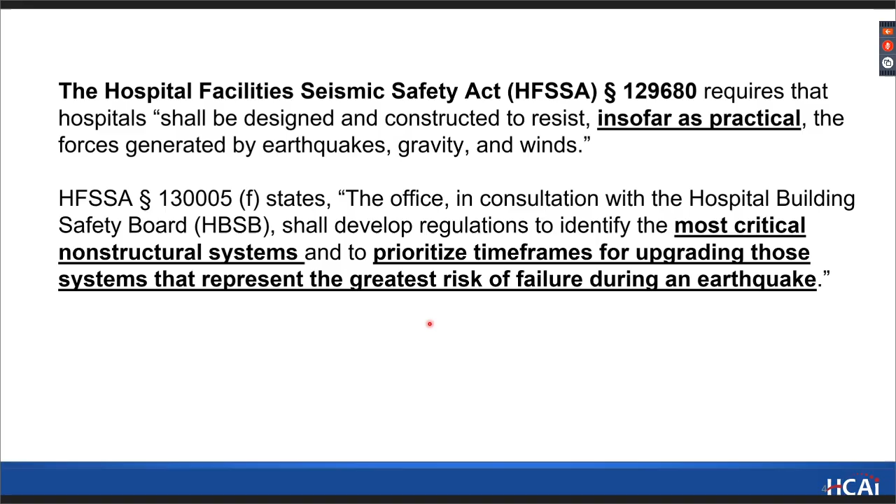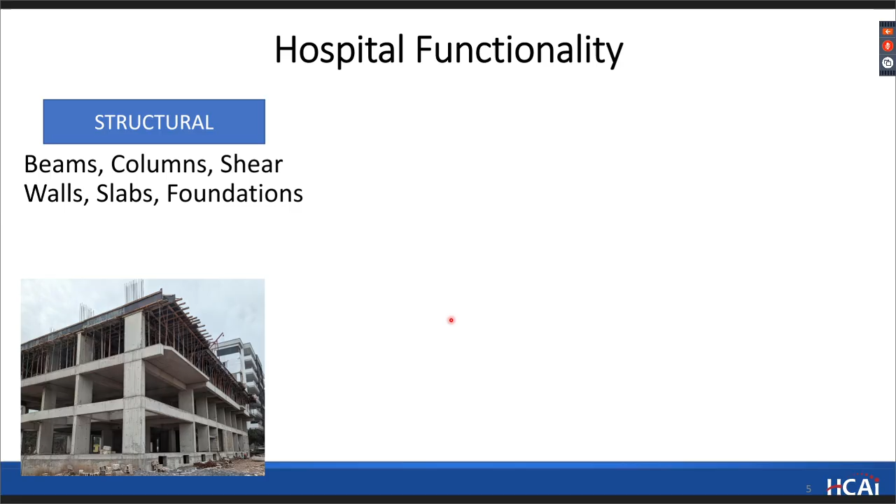When we talk about NPC, we talk about functionality, but functionality really has three aspects. One is structural, which we call beams, columns, shear walls, slabs, foundation, the skeleton of the building. The rating that we use for that is SPC, or Structural Performance Category.

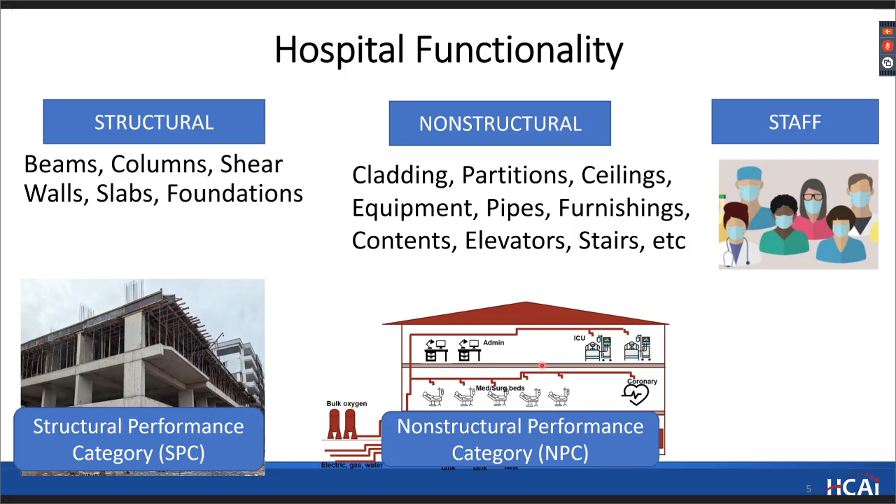Non-structural, so other things in the building, which are partitions, ceiling, cladding, equipment, pipes, furnishing, contents, elevators, stairs, many things, we call that non-structural. And the rating for that non-structural is NPC. And of course, functionality, staff makes everything happen. So what we are trying to do here is to give doctors and nurses all the tools that they need so that they do their miracle every day.

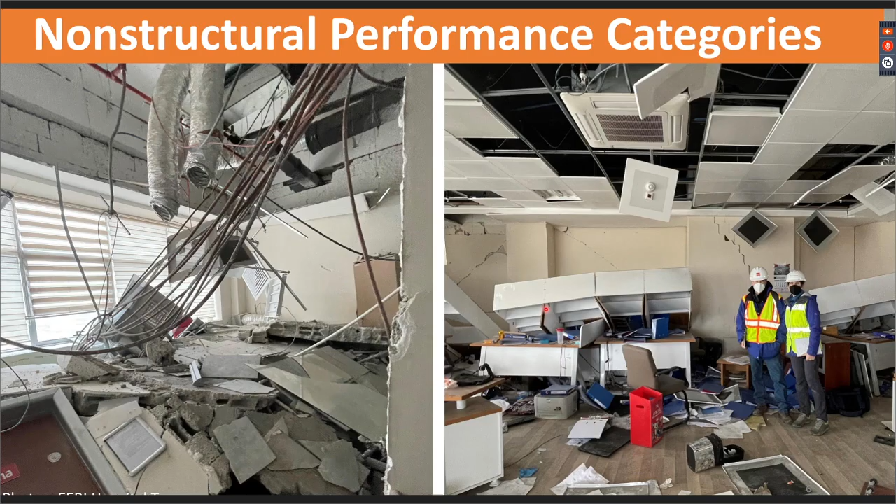So the non-structural, the importance of non-structural systems, there's nothing new, but again, in the latest earthquake in Turkey, it showed a renewed emphasis on the non-structural systems that should be tied, braced, and thought about throughout the building to provide healthcare services after an event.

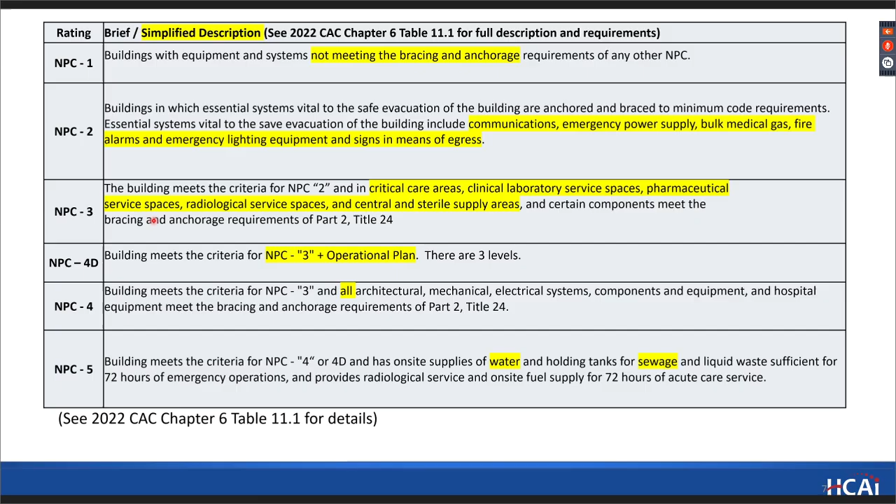So the rating system that I mentioned on the previous slide about NPC, we have 6 categories. I'm not going to go through this table, but basically 1 is the worst, 5 is the best, and there are steps in between, and we're going to go through more towards NPC 4D and 4 today. If you want to know more about NPC 3, I would go back to the seminar 2 years ago so that you will get more information and the handouts.

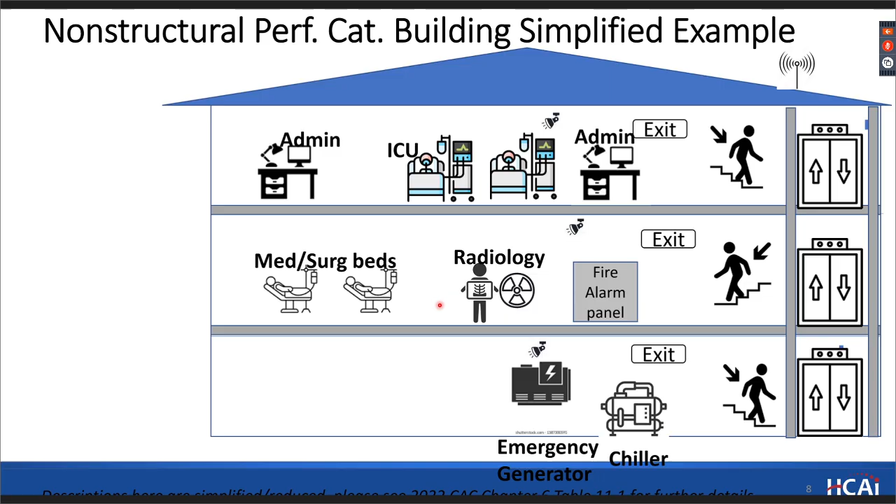I showed this sketch pretty much on all NPC presentations. Again, this is a super simplified example. So let's say this is your hospital building with lots of functions in it: admin space, med surg beds, radiology, so on and so forth. All of these things do work because of utilities, electric, gas, water, oxygen, so on and so forth.

So they are all tied together. There is a network of systems within the building, between buildings, and outside. So as a starting point to this building, our starting point is NPC1, meaning that either nothing is braced or nothing was looked at or evaluated.

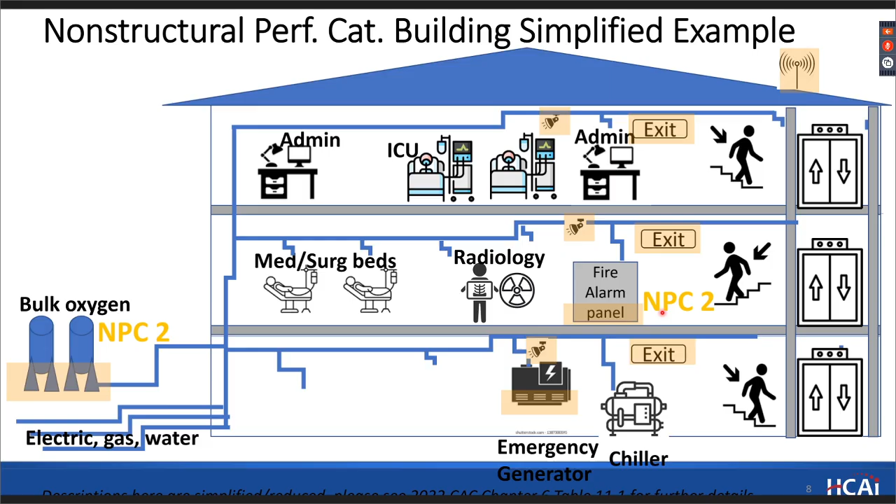If certain evacuation systems generally are looked at, which is pretty much the scope of NPC2, bulk oxygen, fire alarm panel, some emergency generator anchorage, exit signs, some communication, very, very little, the building and the facility gets NPC2 rating.

NPC3 or NPC4D level 1 looks at some critical care areas, such as ICU or radiology, which we call NPC3 areas. Within those boundaries, within the walls of the area, things are braced. So you see that pipe, there will be a bunch of brace here, bunch of brace here, but right outside of it, there's no brace required.

So in an earthquake, obviously, this utility line, if it breaks here, it won't function here. So NPC3 or NPC4D level 1 does not target functionality in those spaces. It basically targets to tie everything around the patients so that it doesn't fall on them, so that they can leave that space safely. So NPC level 4D level 2 and 3, which I will talk about, looks more about the functionality through bracing all the way to the source.

NPC4 is actually a holistic all building systems and utilities. So most of our newer buildings get NPC4, or the NPC upgrade to 4 looks at all the braces and equipment, or utilities and equipment, and bracing all those so that it gets NPC4.

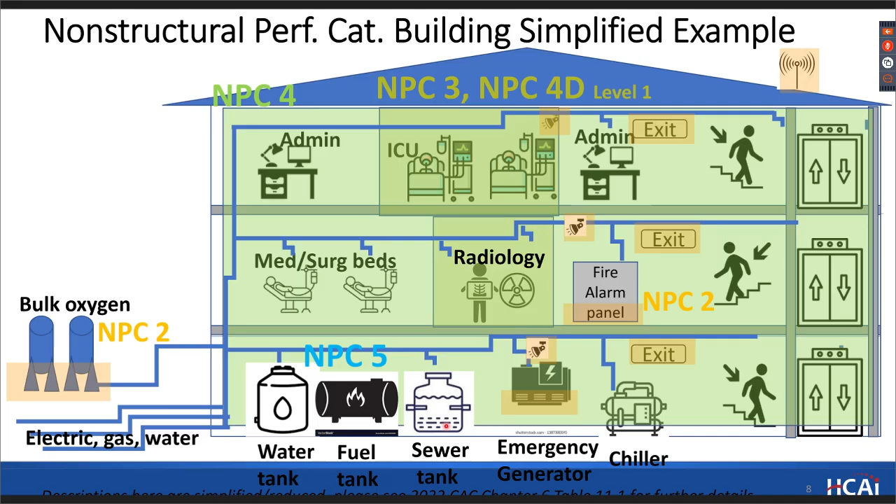As I mentioned, in the last year, while we received a few thousand evaluation reports, we looked at them, reviewed them all, commented, sent it back. So we are caught up. We may have maybe 17 or 18 back check pretty steadily, but if you haven't received a comment from us, talk to us, because you should have received all the evaluation report comments by now.

One common thing about that is when we send the comments out, if the contact is no longer there in the facility, there might be some break in the communication. But you can always log into your project and see where the comments are and when that was made. So I'll focus on 4D and 4 mostly on this presentation.

So for those of you who are not quite familiar with 4D, the requirements are set in California Administrative Code, and you can see the details, the requirements, and all that.

As I mentioned, NPC4D is basically NPC3 with some levels in it, levels 1 through 3, and it's all about bracing and anchorage.

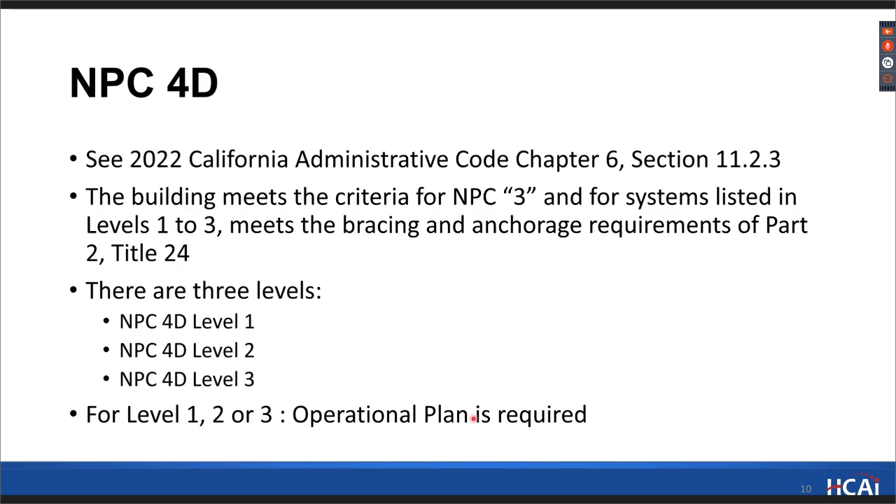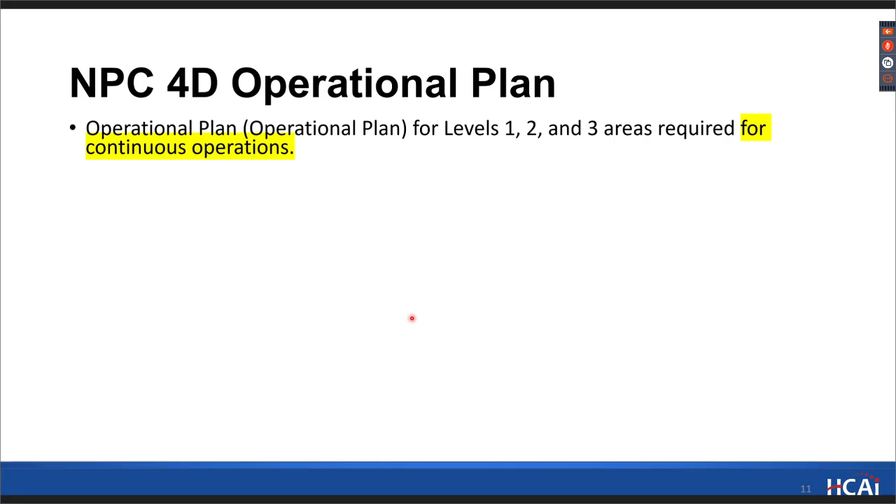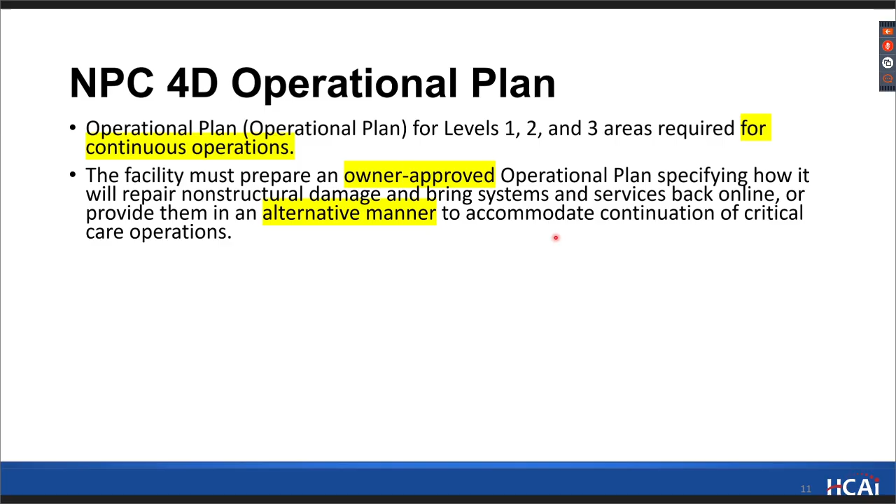So the operational plan is all about continuous operation. How can we achieve facility-wide continuous operation by looking at things more detailed? The operational plan should not be just prepared by design professional. It should be owner approved, and the owners should be truly heavily involved in the strategy of the operational plan. So it looks at where to brace it so that you get that functionality, and maybe where not to brace it so that you have some alternative manners for that functionality, which I will come to. Again, we are looking at keeping the facility operational.

The code also says that when you are submitting this, make sure that you include executive summary, narrative, management of utilities, etc. The operational plan portion, we publish it on our website.

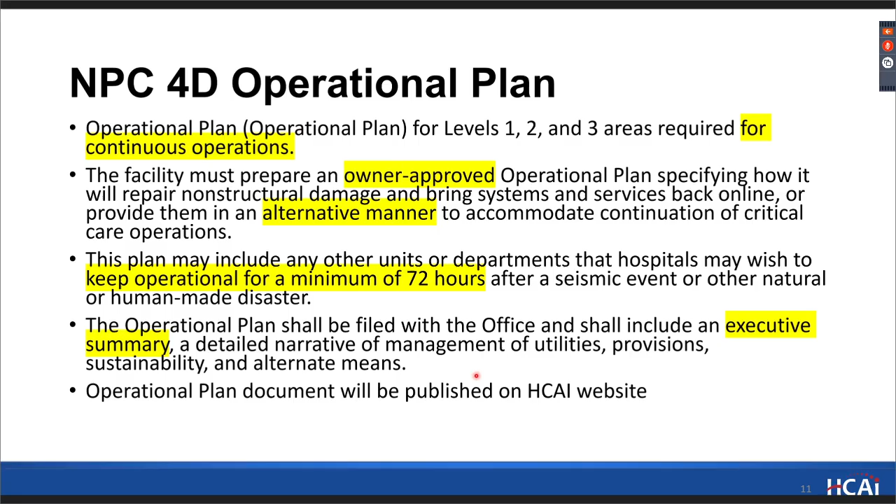Couple suggestions on the operational plans, since we have seen quite a bit of those. Please do not include sensitive information in the operational plan. We publish those, so do not give your staff phone numbers on your operational plans. So please clean those up.

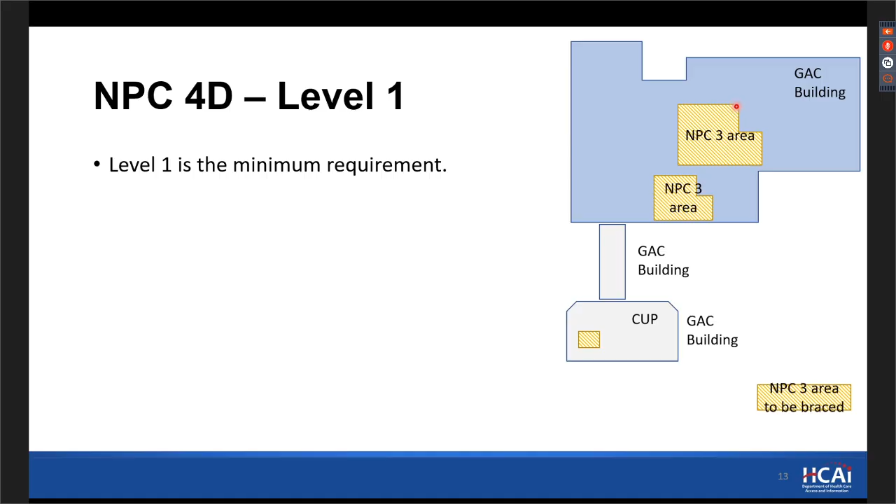Okay, NPC 4D level 1. Quickly, if I go through that - if you have a general acute care building, let me put my laser pointer back up. There are NPC 3 areas, and you have a CUP building, central utility plant, and other buildings that are on the way. Bracing these NPC 3 areas for level 1 is the minimum requirement.

Now, level 2 and 3 are optional, depending on how you want to strategize your facility operation. So some buildings may end up with level 2 or 3, but it's a strategy.

One thing that we keep seeing is design professionals focusing on just the general acute care building they are contracted to, but NPC 3 and 4D also requires the source equipment to be braced. So there needs to be some survey of where the utilities, where the sources are coming from, and most of the time it's just a central utility plant somewhere. So some panels and some mechanical rooms, electrical rooms - those all need to be braced.

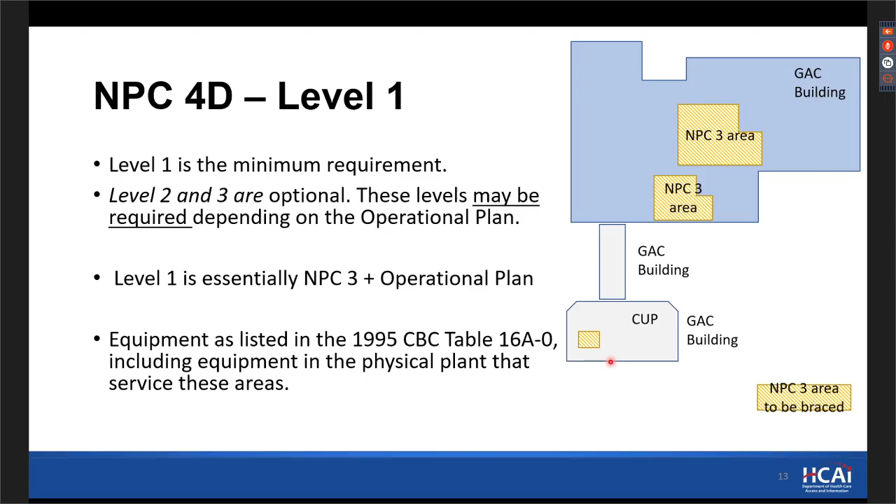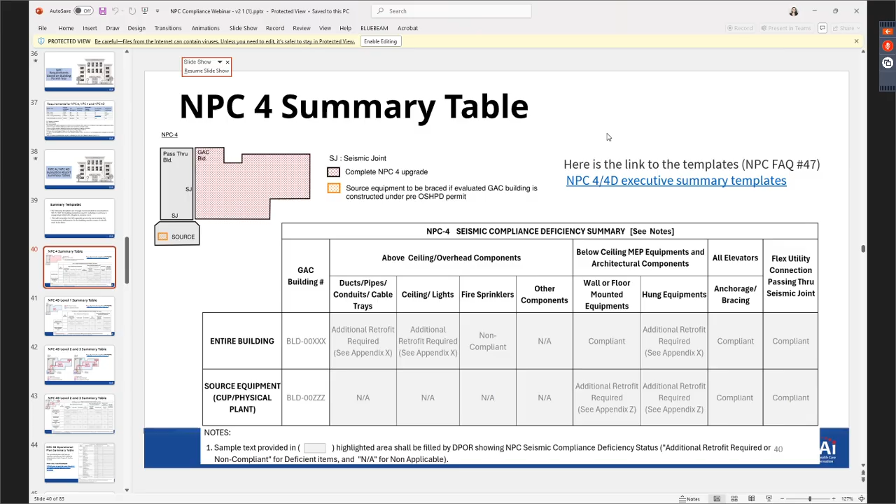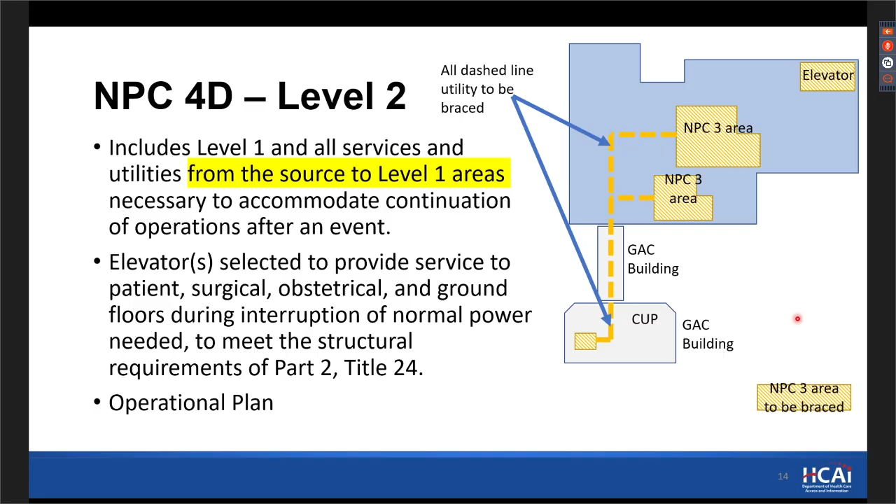Okay, so for level 2, when it comes to elevators, you need to select certain elevators to upgrade. Again, an operational plan is required.

Now, this is something that we use quite a bit, something we call level 1 plus. It's something in between level 1 and level 2.

So just think of two NPC 3 areas right here, and let's say you are bracing from source to that area, so you're basically ensuring functionality here. But this one, you have an alternative somewhere else. So you say, okay, I don't want to spend resources or money on this one because I have a good alternative in another building, so I'm not going to brace the utilities from here to the source. Which means the critical care areas or the NPC 3 areas are not all braced. So your rating is still level 1, but your operational plan gets a whole lot easier.

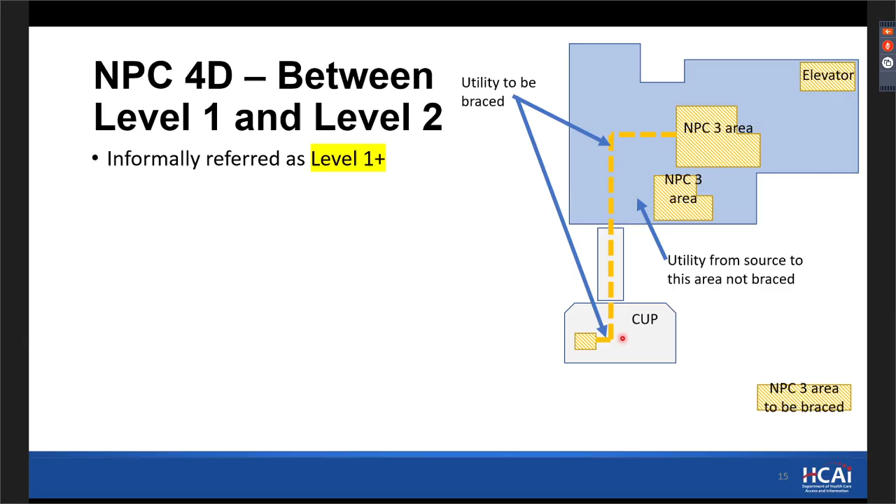So there's this surgical approach you can do to optimize what you upgrade. And again, there's no such thing in the code that says 'plus' - it's just a strategy between 1 and 2.

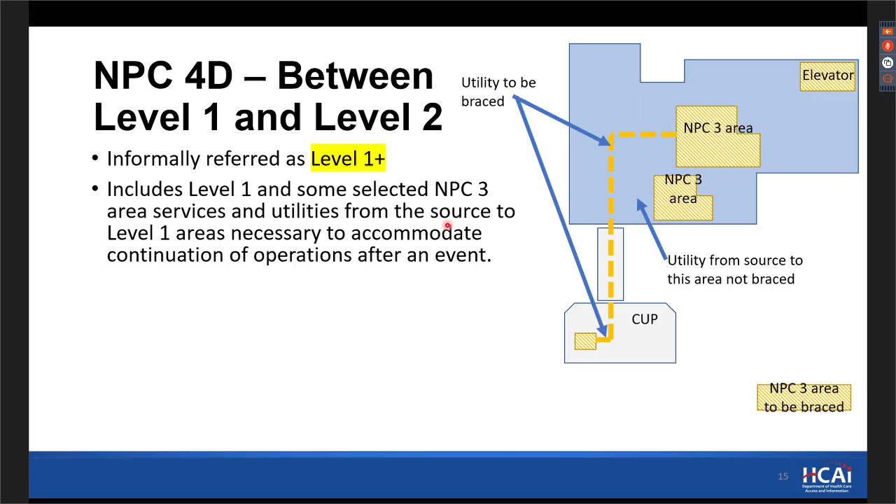Okay, level 3 is basically level 2 with more areas that you choose. So the rules are the same - there's really nothing new there.

NPC 4 is, like I mentioned, bracing pretty much everything - architectural, mechanical, electrical equipment, and so on and so forth.

One common question we got is about NPC 3 area exceptions. Those exceptions don't apply to NPC 4s for upgrade.

Most of the time, there are a lot of past projects in the building that you can take credit for. Just think of it like a map where you have a bunch of areas already explored and upgraded, so it's just a matter of finding gaps between those past projects and focusing on those. But please make sure those projects started in the past were closed in compliance. If the status of those projects is closed without compliance, you cannot take credit, or if you want to know how much was finished in those projects, you need to go a little more document route to see what happened in the past.

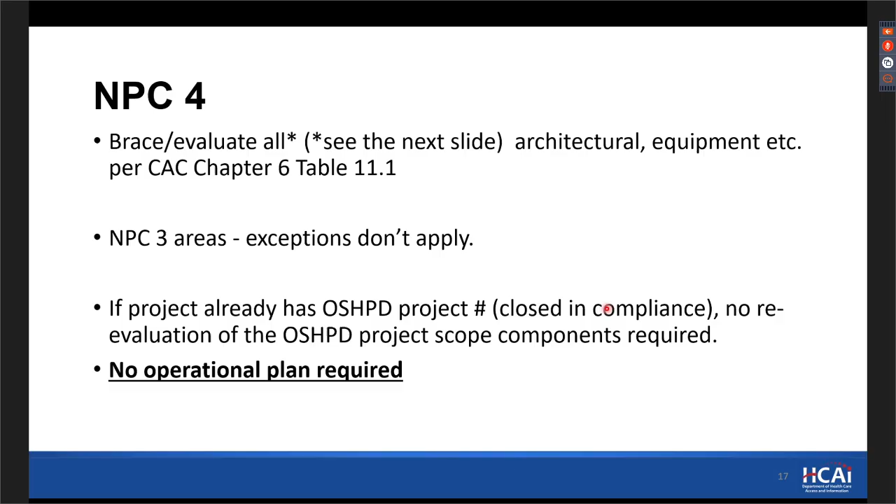For NPC4, the nice thing is operational plan is not required, because if you brace everything in the building, the expectation is reasonably there will be function. But again, no one is guaranteeing 100% everything will work - it's just a reasonable assumption.

Now people say, is it really bracing everything in the building? Well, there are some exceptions in NPC4, and I'll just highlight a couple things. When something is attached to an architectural item, such as walls, people ask, should I upgrade all the light frame walls? The exception here is when 250 pounds is attached to light frame walls, and if a single stud gets 250, then you need to upgrade that stud.

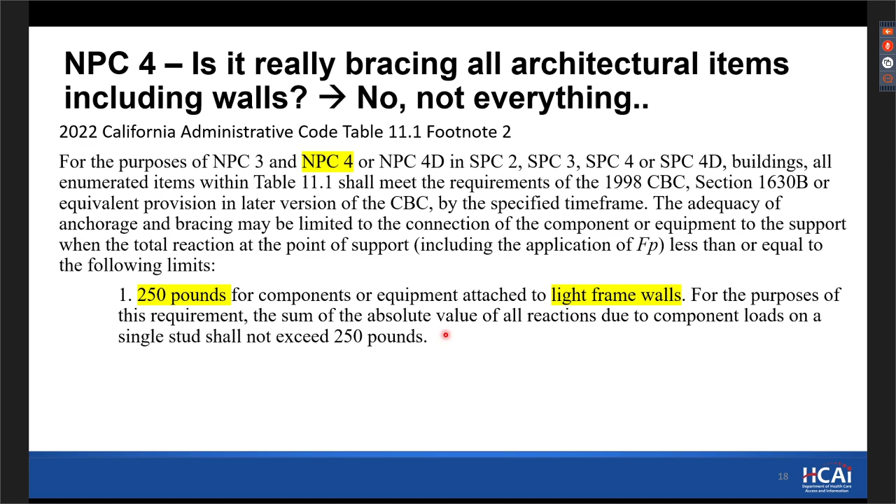250 pounds per single stud is a very big piece of equipment attached to the wall, so this doesn't happen frequently. So the focus of upgrading light frame walls is pretty minimal. And then there are other things like, hey, if I put 2,000 pound equipment, how much more evaluation should I go? It's actually pretty flexible on how much you should go. So it's everything, but not really everything.

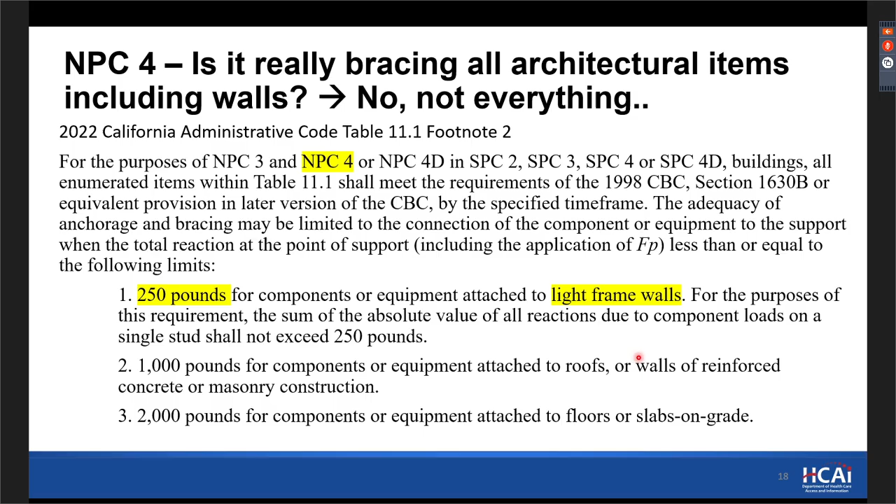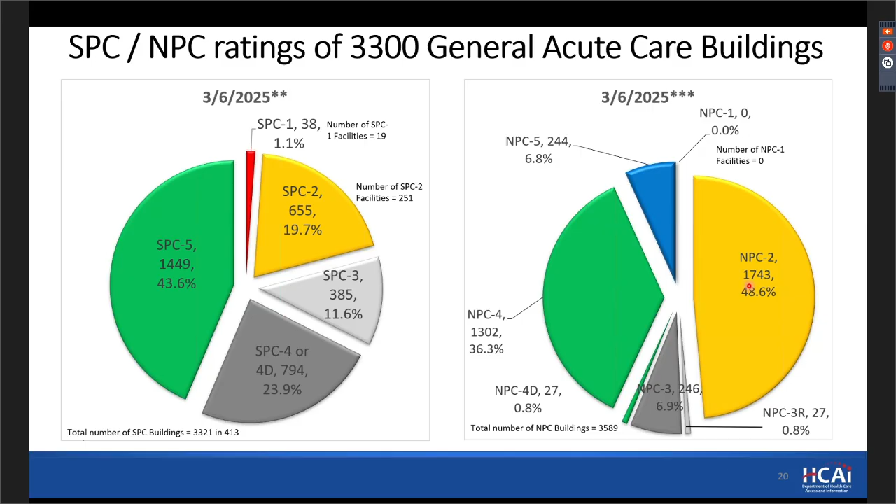When it comes to non-structural, the picture is different. We have NPC 5, 244 - this is growing actually pretty rapidly with the evaluations and upgrades happening. NPC 4's pie slice is getting much bigger lately. 4D is probably accelerating the most, and you're going to see a whole lot more movement on getting the 4Ds. For NPC 3, we still have 246 of them, and almost half of our inventory is NPC2. This is the pie slice that requires anchorage or more careful consideration. Luckily, we do not have NPC1 anymore.

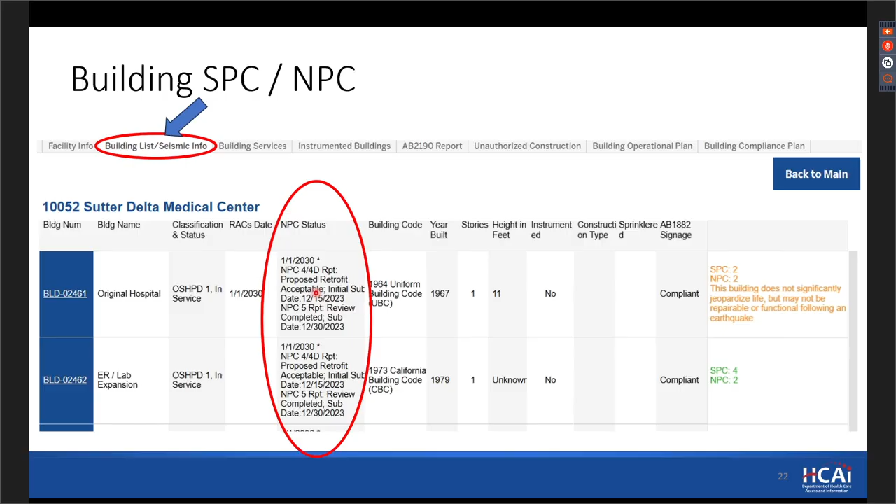Now you may say, okay, what do these things mean? There's some text, so I basically broke it down. Let's take a look at options here. If the NPC status shows not submitted, it's pretty straightforward: the evaluation, we have not received the evaluation report. If you think that this is a mistake on our website, please do reach out to us so we will fix our mistake. But if it is not submitted, it shows not submitted.

Awaiting review means that the report was submitted or resubmitted for back check and is queued for review. If it says in review, which means that it got triaged in so that it has the right components and documents in it, now it's in review.

If it says review completed, it means that we sent the comments out, so please respond to the comments. If you see proposed retrofit acceptable, then it means that we received the evaluation and we accepted the scope. We sent a letter saying that we are accepting the proposed retrofit, and the next step is basically putting together the construction documentation and building it.

So if you see intent to remove general acute care, GAC, then it means that we received a formal letter from the facility saying that they are intending not to continue general acute care services in this building after 2030. So we put this building in a different category, which I will talk about later.

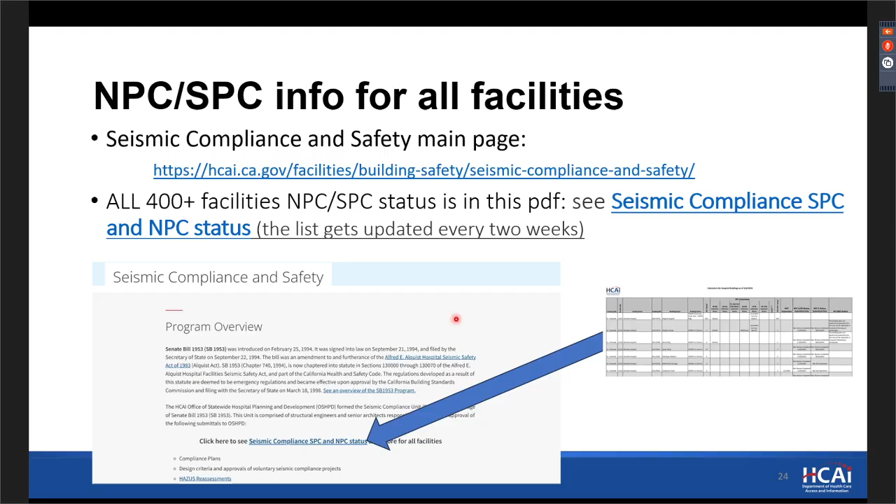It's a PDF, and you may say, well, PDF, I need Excel. Well, the way that we created this PDF from Excel, if you save this PDF as an Excel file, it will convert to Excel file very cleanly. So it's by design. Anyways, you can sort, you can do all kinds of statistics if you want to.

All right, so now we know the rules, now we know the inventory, what are the deadlines? I want to start with NPC 3 compliance deadlines. I know that this is 4D and moving towards that, but we still have a little NPC 3 compliance deadline issue. We have 2 seismic design categories, seismic design category D and F. F is very high seismic area, D is high seismic area.

Okay, the other deadlines: for the NPC 4, 4D, and 5, the NPC compliance deadlines have been set for a long time ago. But recently, in the 2025 code, with the addition of AB 869 and the California Administrative Code revisions, there were 2 little additions in between. The first one: January 1st, 2024, that's the submittal of non-structural evaluation deadline for all hospitals. So there's no change there.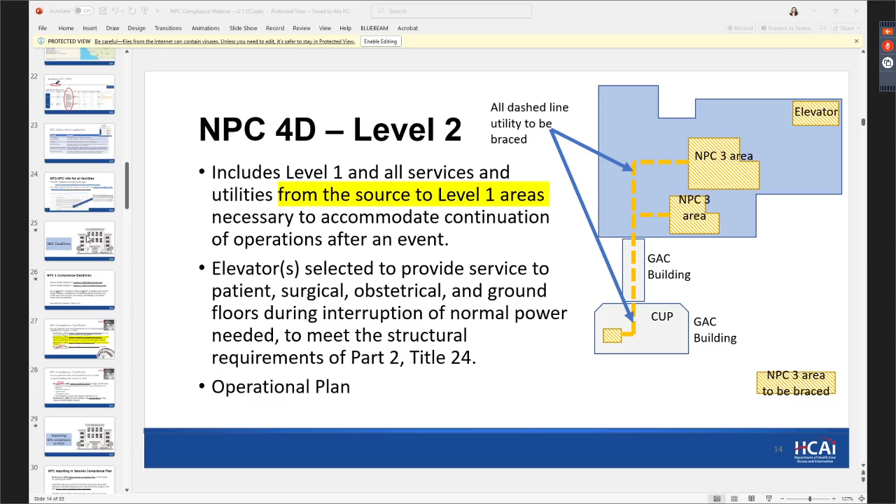By March or January 1st, 2026, all facilities need to submit a seismic compliance plan. Please take a look at the previous webinar. By March 1st, 2026, all hospitals, whether seeking delay or not, need to submit construction documents for NPC 4, 4D, and 5.

By March 1st, 2028, that's the deadline to obtain a building permit. For facilities not under AB 869, the finishing date is January 1st, 2030. Whatever extension AB 869 facilities get, that will be their deadline to finish construction.

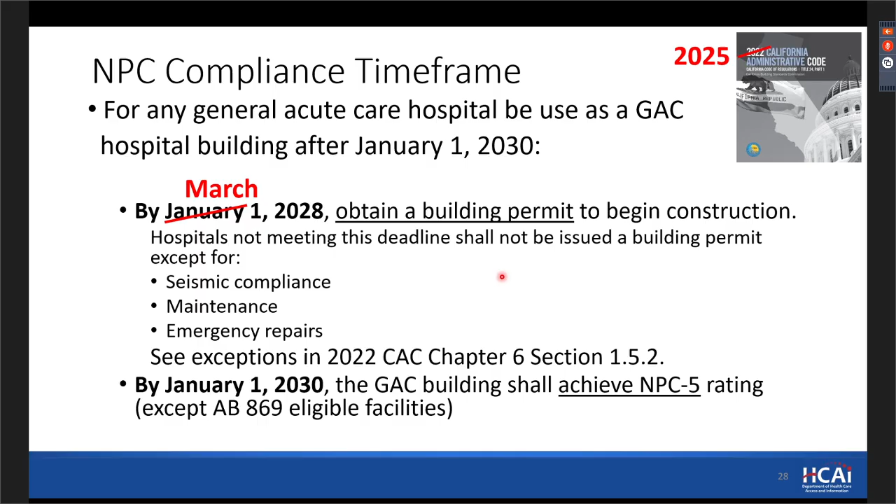You may ask, why did January move to March? Because most people in this deadline-driven industry submit at the last day or the day before. January 1st is generally not a good time because everyone is on vacation, and bringing the design professional back from Christmas vacation when things are needed isn't fun.

Reporting NPC compliance to HCAI. So those are the deadlines, but how can we keep track of and report whether these deadlines are met or not met? We will do all of this in our new automated seismic compliance plan. Again, I highly recommend looking at the previous webinar.

The way we'll be asking everybody is to put the NPC milestones in the seismic compliance plan for 4D and 5, including your time of submitting construction documents, getting the permit, and completing. We're going to ask you to put all of that in the seismic compliance plan.

So how do you do it? Basically, you use our guide. This is the ESP e-services portal user guide, section 21. It walks you through step by step on how to log in, access, and use the menus. It's more like a software user guide, and we've published PIN 80 so you can look at the background behind it.

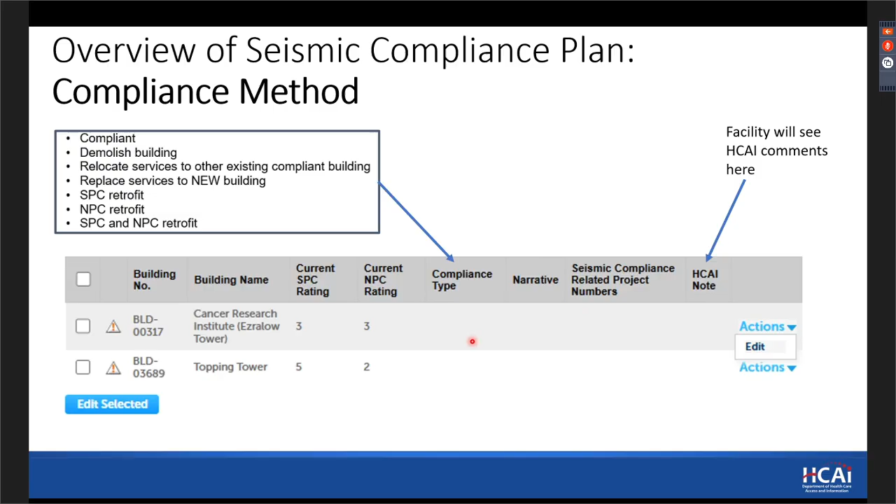The second table is more about the details of each building, again with a predetermined dropdown. I would focus on the bottom part of the dropdown, which deals more with the NPCs.

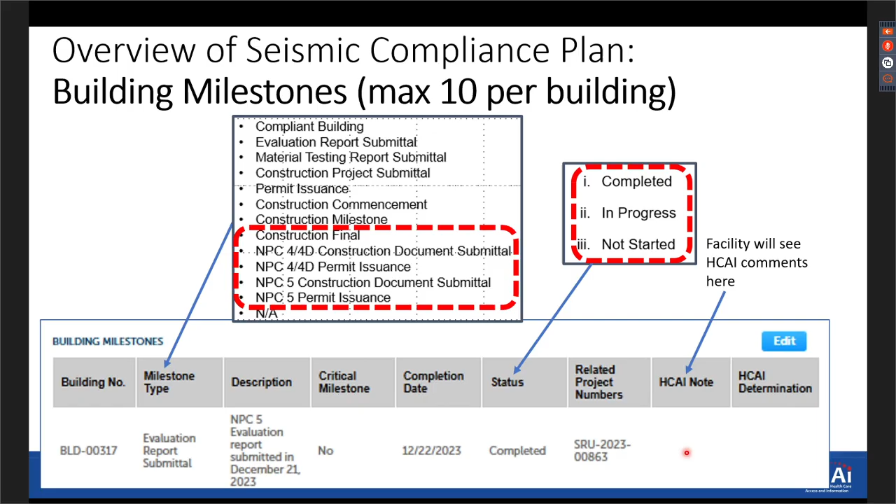We've pre-populated these so you can select and put a date. When you complete it, you can mark it completed, in progress, or not started. If we have comments, you'll see them right next to each item, for example if something hasn't been submitted yet. It's very straightforward, and if you have any questions, let us know. That's all there is on the seismic compliance plan for NPC 4, 4D, 5 reporting.

Again, I noted down how we're going to do this. There's a little nuance with 4, 4D, and 5. For 4D, each building has its own plan—some upgrade to 4D, some upgrade to 4, some get demolished, so it's building by building.

When it comes to NPC 5, it's more of a campus-wide approach. So if you're putting a big sewer tank outside, that will make everything NPC 5 after every building is done with 4 or 4D. Repeating the NPC 5 project submittal on each building would just take up a lot of time and be unnecessary repetition, so we're saying please put it in one of the simpler buildings where you're not putting too many milestones.

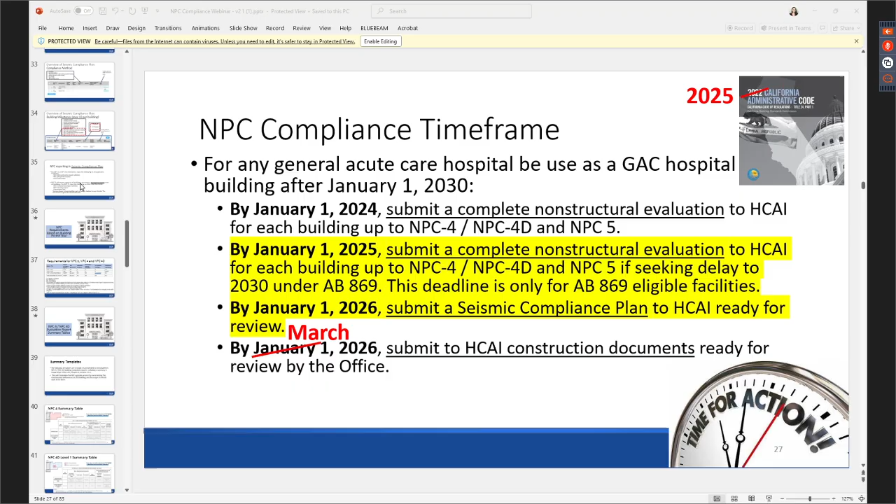It can be, again—kick me out. We'll have an IT talk. There we go.

Okay, so you can choose a simple building like canopies and sheds, and you can put the NPC 5 dates there. And when you do that, the system will recognize that there's an entry of NPC 5, so we will assume that this is for the entire facility, which generally is.

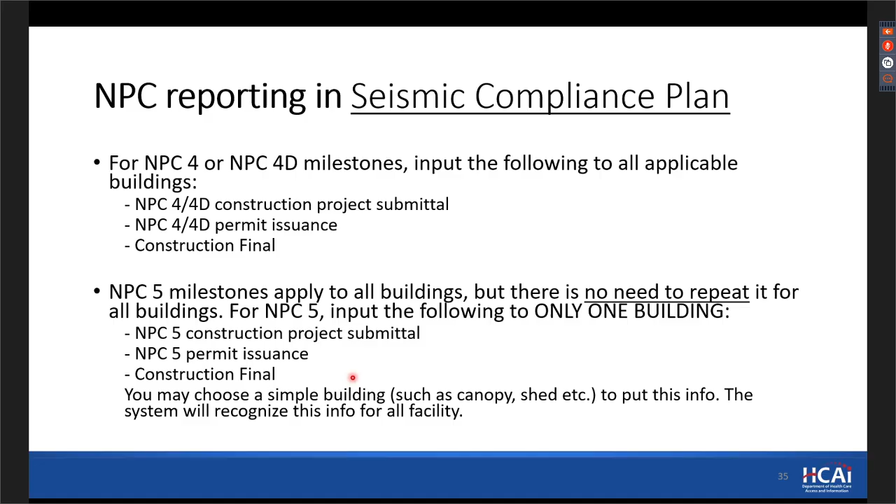Okay, so now I'm going to start going into the details of NPC 4 and 4D. I'll talk about some nuances, some frequently asked questions. So we'll basically touch on, again, a lot of nuances here.

One thing that I would start with is the big picture of the building. The older the building gets, the more scope of work that needs to happen. So we have categories. The best place to start is to figure out how old is the building. What was the permit year of the building? What was the construction year of the building? So start with the age.

When you start with the age, the very important thing to identify is who was the permitting agency. Was it local, like city jurisdiction, or was it OSA, which is the agency, or OSHPD - and then we split from OSA and became OSHPD. Was it under OSA jurisdiction, or was it under our jurisdiction?

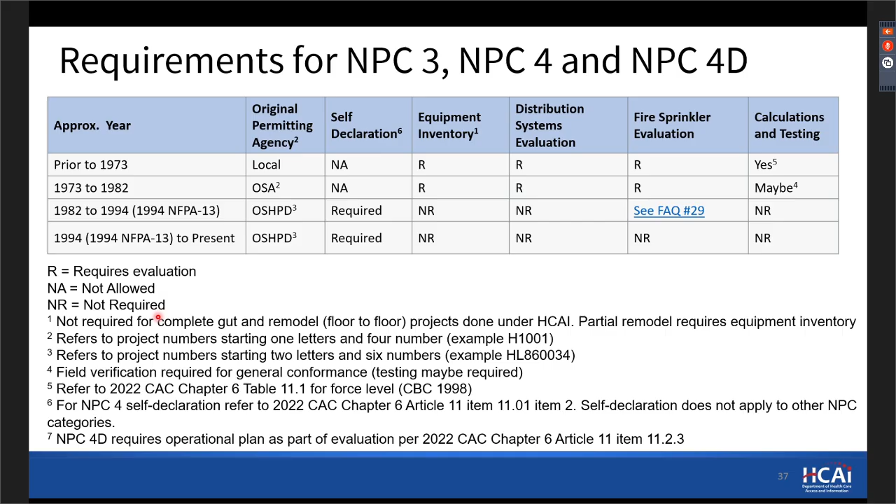You still have NPC 5 to do, but again, this is not about bracing. So take a look at the footnotes for this. But again, it's very important to start with the age.

The reports, once the evaluation is done, it's important to summarize what's the scope of work - what are we trying to upgrade, so the engineer knows - but it's sometimes very difficult to track what's truly needed. So the code says a narrative and a summary table is required, but after seeing many evaluation reports, we started commenting saying that you've got to have a summary table that everyone can follow. So we basically came up with a template.

So we are strongly recommending including a template, summary template, at the first page. Again, we are here today, we won't be here tomorrow. Your engineer may not be here tomorrow. So to keep track of what has been done, the summary tables are super important. So we came up with a summary template - you can click on this link and download it if you choose to.

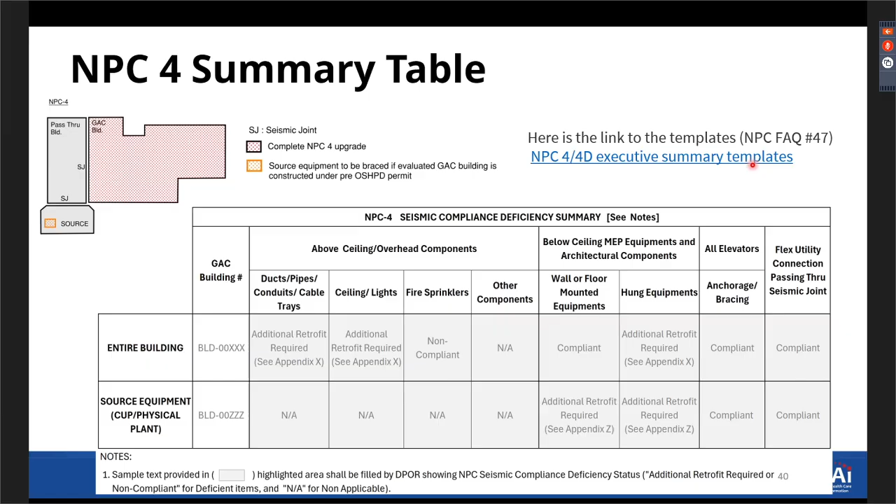NPC 4D level 1 summary table is a little different than NPC 4. So again, some similar items, but now you are not talking about the entire building in terms of bracing. You are now talking about areas within the building and the source equipment within wherever those source equipment are.

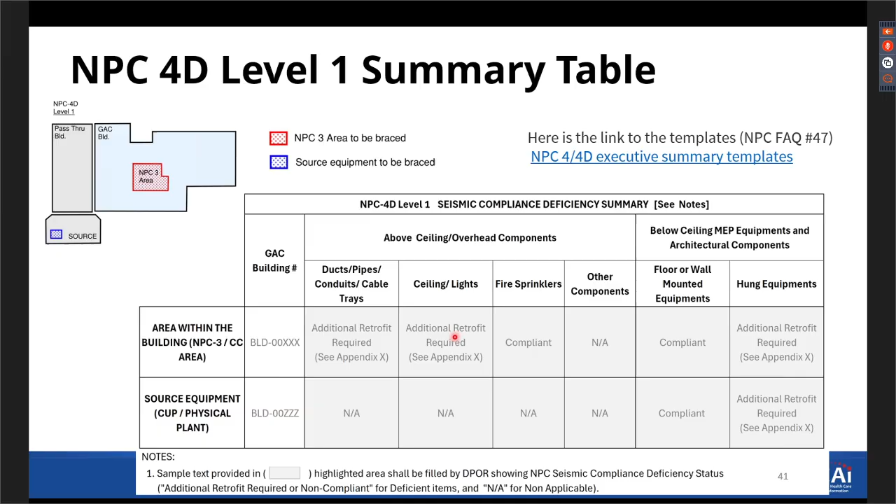So again, give us the details on what the plan is, so that when you go to this building in the future for hung equipment, if you open a project and finish the retrofit, then you can come back and say, yep, this item is done under this project. So now it becomes compliant. Well, okay, you still have those 2 items that we need to see projects for. So it kind of starts basically addressing things on a more high level.

NPC 4D level 2 and 3 summary table, again, is a little different than level 1. Again, you can download the templates here. So I want to just quickly talk about the setup here.

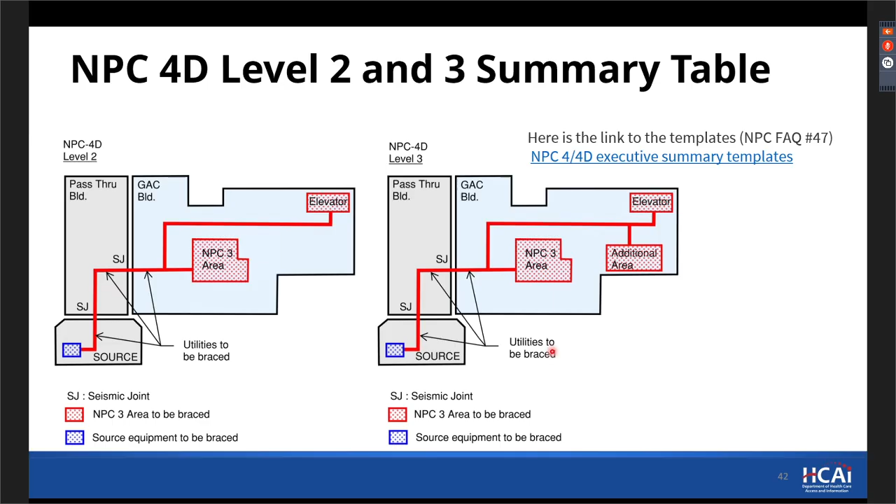So you have the source building, you have a pass-through building, you have seismic joints, and you have NPC 3 areas, additional areas, elevators. So these are basically surveyed. So these are utilities to be braced. So, okay, how are we gonna prepare a summary table for that?

Again, I'm gonna start with the bottom line. The source equipment, tell us which building it is in. Tell us where the utilities will be passing through, because those are the buildings that you will have projects in, and utilities in passing, another passing through building, and this is your main building. If you identify these, then you can actually start checking these things off as you make progress.

The reason that we are emphasizing pass-through buildings is NPC projects come with many little multiple projects. So it's very easy to keep or lose track of the focus. So when you have many little TI projects that are touching many different parts of the area, then you may start actually asking, well, did I do this pass-through building or not?

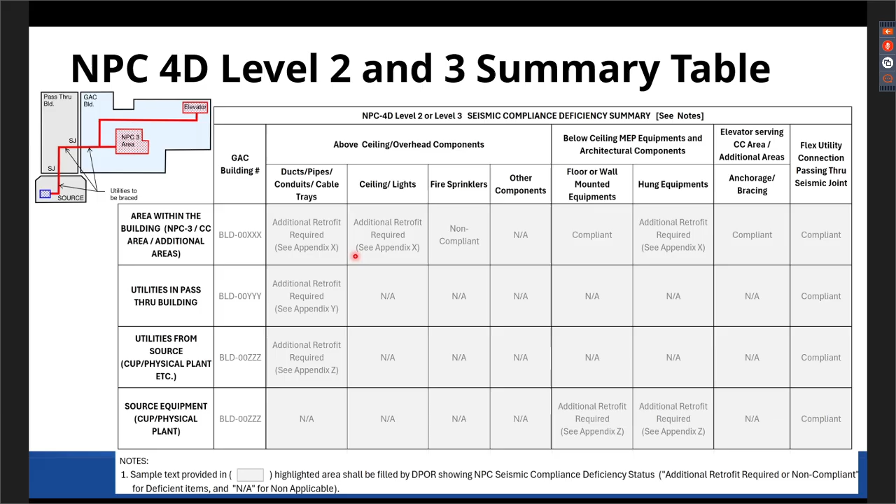So anyways, this is something helpful. If you have better suggestions, we are open to look at it. All we are trying to do is make the scope and tracking easier.

Okay, what about the operational plan summary table? Again, here's the link for the template. We'd like this to go to the front of the operational plan. So we kind of divided into the code described service categories: basic clinical services, support services, supplemental services, other services. So we just listed functions, mostly aligns with the AB 1882 reporting.

So just tell us in the building that you are looking at, which services are in that building, and what's the plan for those functions. Like you can go functional, reduced functional, or you are basically strategizing to provide this sterile processing in another, maybe a newer tower that you built recently. So then we'll say, okay, then all we need is the NPC3 area bracing, not source to source to the area. So again, this kind of gives us a big picture on how you're approaching your functionality.

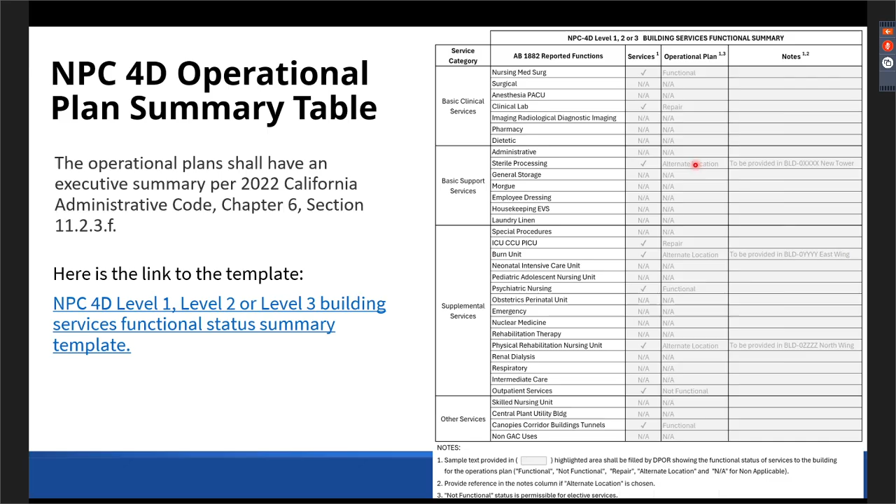Okay, how am I doing with time? I'm gonna go through a few more slides because we lost a few minutes during the technical difficulty. So I'm gonna just go through those.

Operational plan, again, does it have to be included in the evaluation report? The answer is yes. Can we submit it later? The answer is no.

Now, right after that, we get a follow-up question. Okay, I'm gonna give you the operational plan, but can I submit it later with the revisions? The answer is yes, you can submit it, because, again, the things change, the strategies change.

So it's, this is driving me crazy when it is kicking me out. Okay, going back.

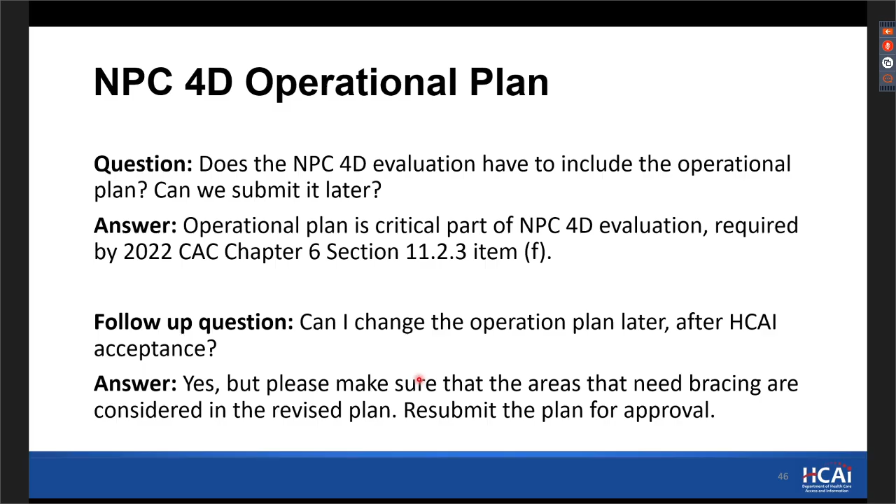So you can resubmit the plan for approval. So again, your plans may change. It's okay. Just let us know. If it is a minor change, obviously you don't have to. You can just accumulate the changes and then submit it when it makes sense. But that's what we recommend.

This is a big question. The next two are the big questions.

Let me first explain the question. So we have a facility with lots of buildings, and I'm focusing on this building, and I have NPC3 areas in this building. Let's say I have an ICU and a radiology. For the radiology, I have a plan because this building has a radiology department, maybe not the same size, but some alternative that is in this building. So basically we say, okay, radiology is acceptable to have the alternate location so that you don't have to brace from source to this area.

But what about ICU? The question says this is exclusive to this building, and you have no alternative to that service. So if you shut that down, it's not acceptable - that's not continuous operation. So we will ask for that ICU to brace from source to the ICU. You still get level 1 because you're not bracing from source to radiology. So what I mentioned in the past, level 1 plus is kind of the approach here. But if there's no ICU, if there's only radiology, then level 1 is acceptable. So we just move on.

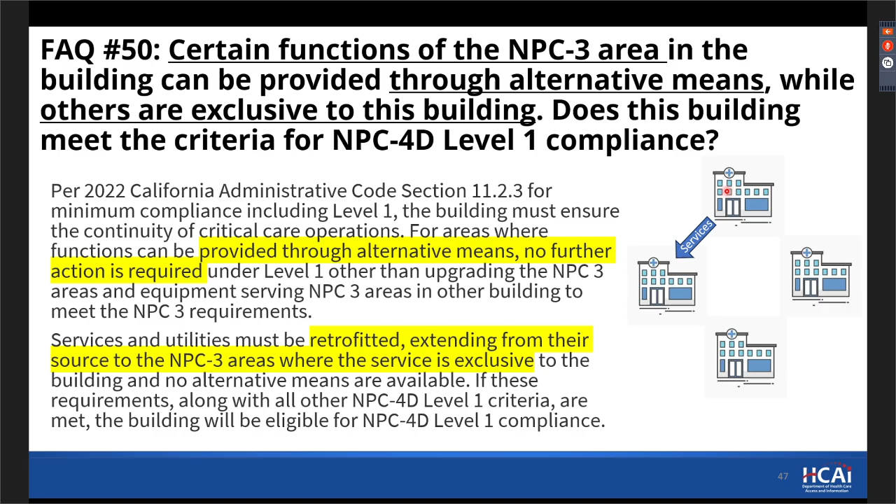What if I have the same facility and I want to do level 1 on every single one of them? What we started seeing, which we are pushing back on, is this building will have the services somewhere else, this building has services somewhere else - across the facility. So the entire facility cannot be NPC 4D level 1. You cannot just keep the services out of this building within the same campus. The argument we keep seeing is we're going to shut down the facility, and there's another facility probably within X number of miles. Again, an evacuation is the last resort option, not a design target. We are designing the facility to provide services after the earthquake. So therefore, all buildings in the facility cannot be NPC 4D level 1.

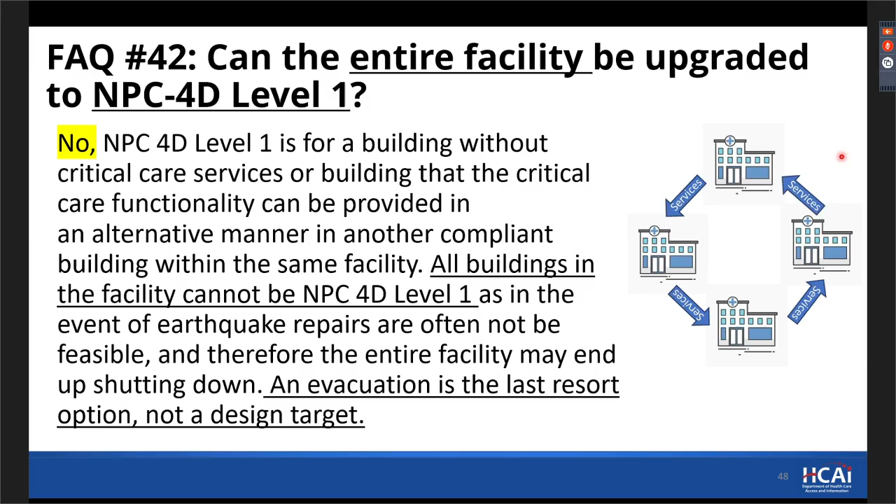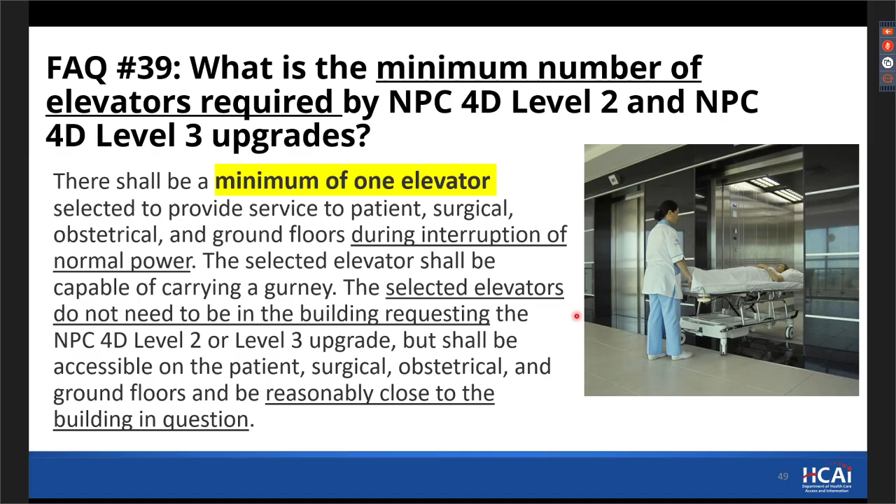Okay, what is the minimum number of elevators? For level 2 and level 3, a minimum of 1 elevator. This is a pretty basic requirement, so that hasn't changed.

The other question we get quite often is, okay, I have a central utility plant with no inpatient services in it - so can I do level 1? Which means the equipment would be anchored, but all the utilities above will not be anchored. So obviously the operational plan would say the entire facility will be shut down because the central utility plant is so critical to the facility. A non-functioning central utility plant is basically detrimental.

Rather than going back and forth many times on the operational plan, we are basically getting to the point that central utility plants as standalone buildings need to be NPC 4 - meaning please brace everything in those buildings. Again, the code doesn't say central utility plants has to be NPC 4, but the code says your operational plan needs to ensure continuous functionality. So not bracing the central utility plant defeats the purpose of the operational plan. So cutting to the chase, central utility plants need to be NPC 4.